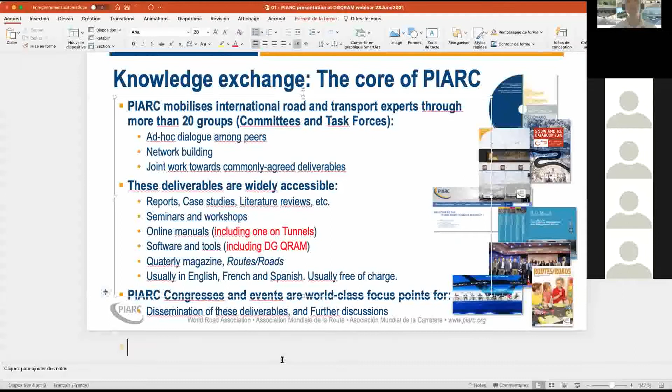In addition to seminars and congresses, we've organized numerous online events. I won't bore you with the details, but about a month ago we organized a very interesting webinar with our colleagues in India, the Indian Road Congress, on road tunnels construction and operations. And we have this webinar today. If you want to stay up to date with all these events, you can check our calendar on the website - there will be many more.

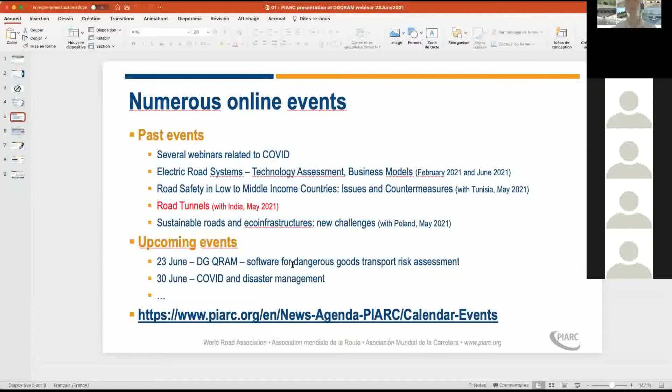The way we work is through committees - this table presents all of them. The Tunnels Committee is part of what we call the Resilient Infrastructure theme, which gives a flavor of what we're working on during this four-year cycle. Lots of topics, which will be presented more in depth, I'm sure. Let me reiterate that this is one of our most dynamic committees.

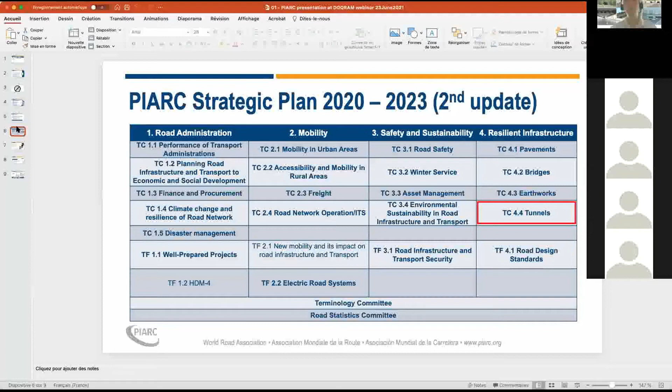Recent publications include one on tunnels called Improving Road Tunnels Resilience, published a few months ago, and others. There will be many more coming in the next months, and I invite all of you, if interested, to check them on our website and download them - they are free.

This is a very interesting webinar today - I think we haven't talked about DG-QRAM in a long time. If you want to know more about what we do and join us for future events, please note the World Winter Service and Road Resilience Congress, taking place virtually in February next year, the SURF conference in September, and in October 2022, together with our colleagues from Spain, we organize...

In October in Spain, together with our colleagues from the Ministry in Spain and all the excellent partners we have in that country and internationally, the second International Conference on Road Tunnel Operations and Safety. The first took place in Lyon, France in 2018, and the second is going to be just as great.

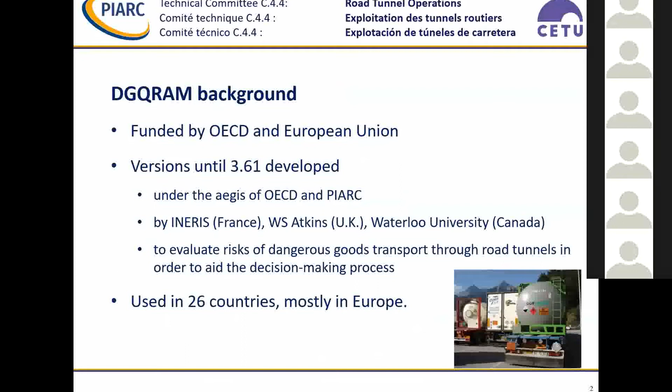Sorry for this, we have made some tests, but as always, even when there are tests, it doesn't always work. So how is it now? No. Okay, let's try again, sorry for that. It should work, I will try another thing. Okay, yeah, is it okay now? Go back to the previous one. Okay, yes, I will try. Okay, it works. So, sorry, we have made tests twice, but as always, this is always the day it doesn't work properly.

Let's go to the use of DG-QRAM. So you can use this to assess the societal risk of transporting dangerous goods through a tunnel or along a route. Then you can compare the societal risks with reference criteria or between routes. You could also assess the societal risk for each ADR category in order to determine which category minimizes the risk. But with the current version 3.61, it requires some expertise to do so. We will ease this with a new improved version, and Nikos will tell you more about this.

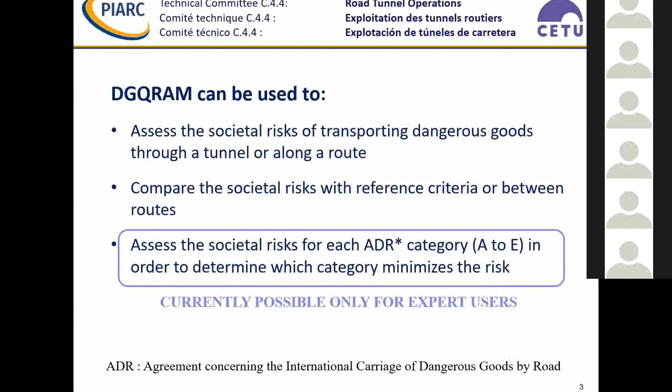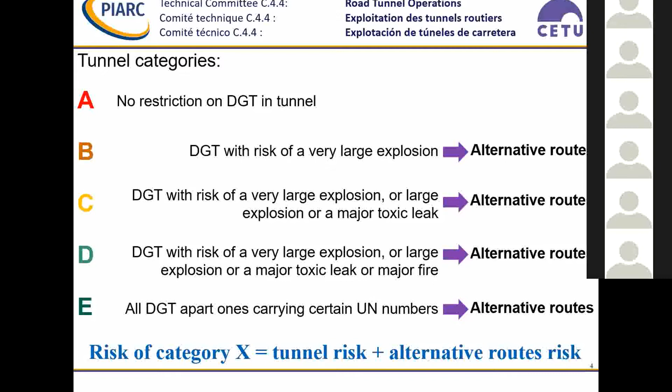So let's have some words about tunnel categories from A to E. Each category corresponds to a certain risk level acceptance in the tunnel. That means for category A, all dangerous good transports are allowed in the tunnel. With category B, dangerous goods transport with risk of a very large explosion are forbidden in the tunnel and must circulate on alternative routes. Through to category E, nearly all dangerous goods transport are forbidden in the tunnel. Therefore, the risk of a given category is the sum of the risk on the tunnel routes and of the risk of alternative routes. That means the risk of dangerous good transport allowed to travel in the tunnel, plus the alternative route risk, which is the risk of dangerous good transport forbidden in the tunnels that must circulate on these alternative routes.

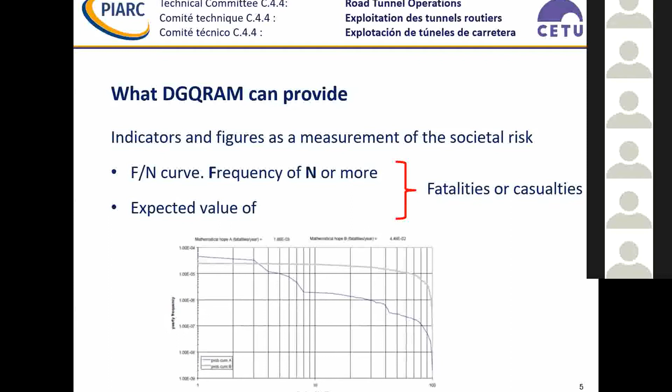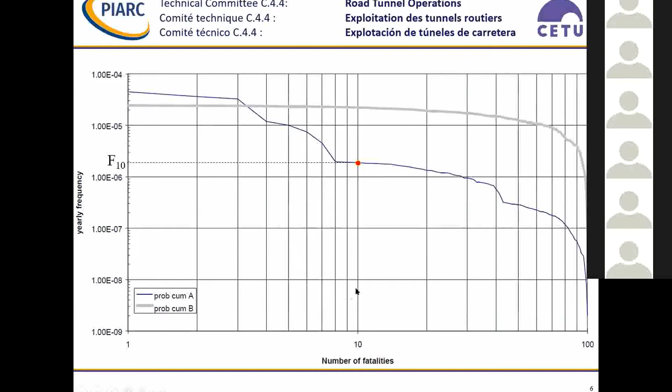DG-QRAM can provide you indicators and figures as a measurement of the societal risk, especially FN curves, in which F is the frequency to have N or more fatalities or casualties. The second result type is expected values of fatalities or casualties. If we look at a given curve, given the principle that F is the frequency of N or more, you always have downward curves, represented with an abscissa in logarithmic scale. If you look at this red point, it represents the frequency to have 10 or more fatalities. So F10 is the frequency to have 10 or more fatalities.

Then let's talk a bit about how DG-QRAM works. I won't say so much here because Raphaël will tell you more throughout an example.

Mainly the DG-QRAM tool is based on 13 scenarios. 11 of them are linked to specific dangerous good phenomena, and there are 2 fire scenarios for certain dangerous goods. Of course, these 13 scenarios are not exhaustive, but they are representative of all the dangerous goods you could have en route, and sometimes for certain of them in a conservative way.

These scenarios are modeled by the tool based on input data you feed them with, like characteristics of routes, traffic, including the time period, etc. And after some calculation, it will give you outputs: FN curves or expected value.

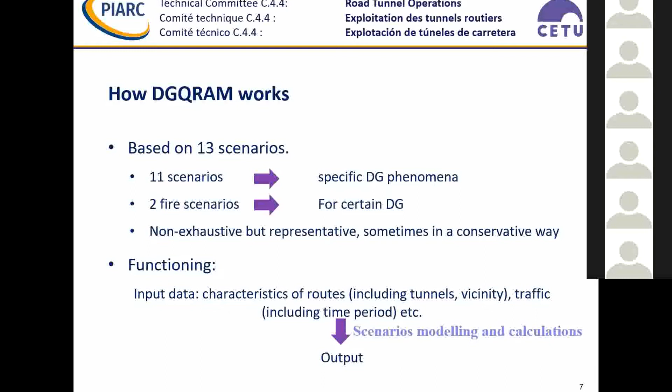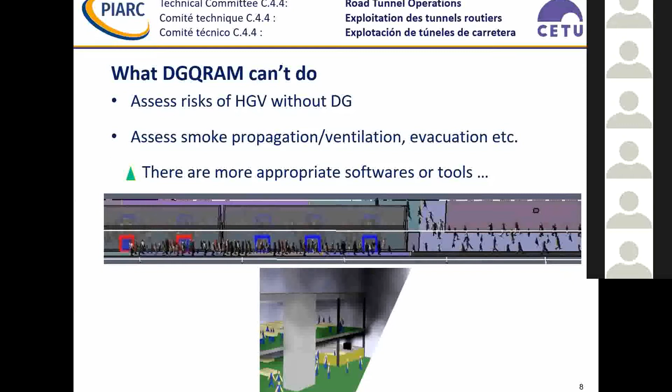DG-QRAM is not the best software or tool to do certain things, especially it's not the most appropriate software to assess risk of heavy goods vehicles without dangerous goods, or to assess smoke propagation, ventilation, evacuation, etc., because its focus is not the fire itself, but the dangerous good phenomena. So there are more appropriate softwares or tools that will give you this kind of assessment, like FDS, for example, and of course, others.

To properly use DG-QRAM and somehow enjoy it, you need some general competencies. First, in tunnel safety and equipment, for instance ventilation, but also in the field of safety and risk assessment of dangerous good transportation. And it's necessary to have a good knowledge of the DG-QRAM user's guides before trying it. It may be a bit frustrating, I know, but it's far better to first read the DG-QRAM user's guide and then afterward use the tool.

Then you should also be aware of the software limitations and understand it in order to properly interpret the results, because as all tools, it has its limitations. And at best, you need training, a specific training to use DG-QRAM.

So the next sessions are likely to be organized in 2022. I invite you to check regularly the PIARC website, and you have a link below with information to find the information regarding this training session. As I said, the next sessions are likely to be organized in 2022 after the end of the project.

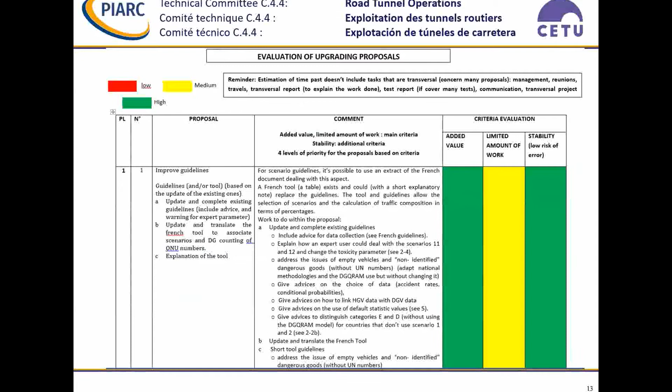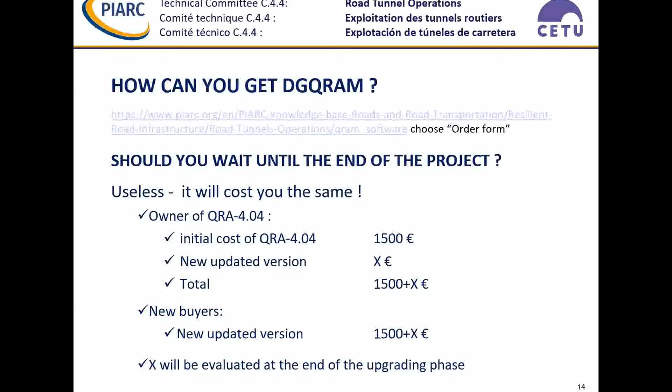So to conclude, you can get DG-QRAM again by using these links. You will have all the presentations after this webinar, and by choosing order form, you haven't to wait to buy the software. If you buy the current version 4.04, and if you update it later by paying some euros, it will cost you the same as if you buy the new updated version after the end of the project. So this is the end of my presentation.

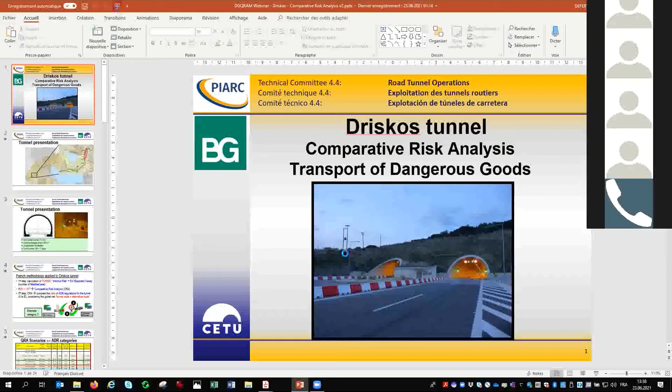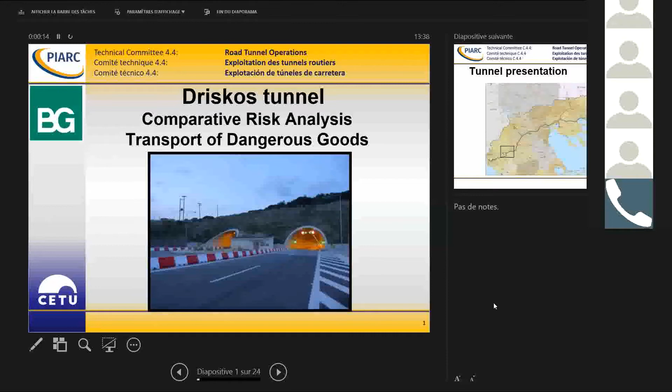Yes, perfect. Good afternoon, my name is Raphaël Defert. I am an expert in tunnel safety and industrial risk. I'm very pleased to speak about this software, which is a part of my professional life. 20 years ago, and then 10 years ago, I participated in the development of this model for PIARC, and later for the Swiss administration. Now I am the project manager for new developments of the model. I also provide training courses for new and experienced users, and from time to time I have the chance to use this software for case studies, such as the Driskos tunnel that I'm going to present to you now. For my part, Driskos tunnel is a good example of an international case study because it's a Greek tunnel, and we applied on this tunnel the French methodology for transport of dangerous goods assessment.

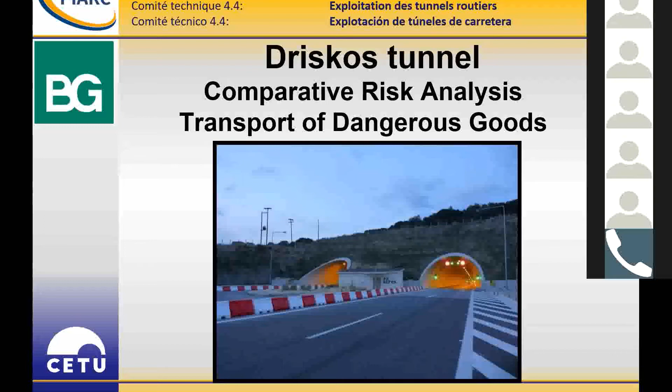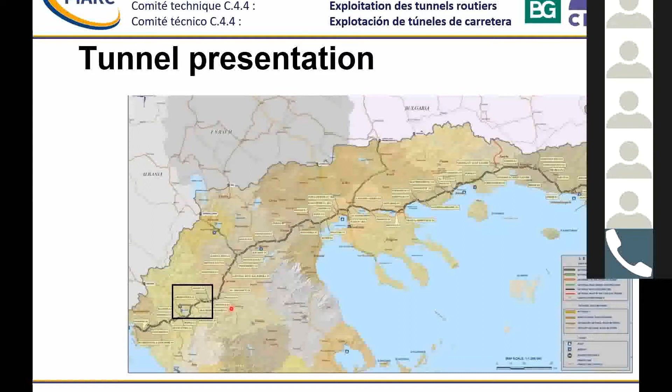A short presentation of the tunnel, if you can see my screen. We are in the north of Greece. There is a long motorway in the north of Greece operated by Egnatia Odos - I'll just show this motorway. In the west part of this motorway, there is the city and lake of Ioannina, and of course there is a tunnel in this area on the new motorway - it is the longest tunnel of the Egnatia network.

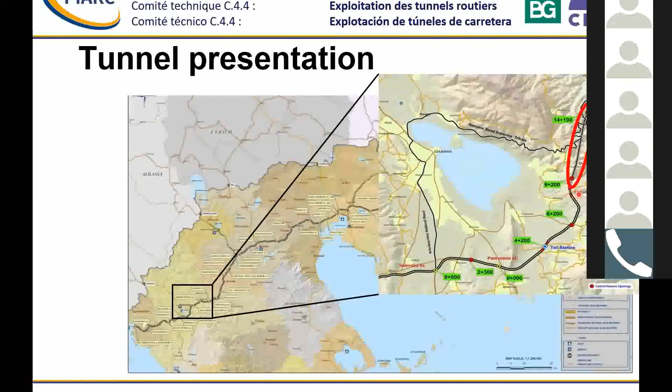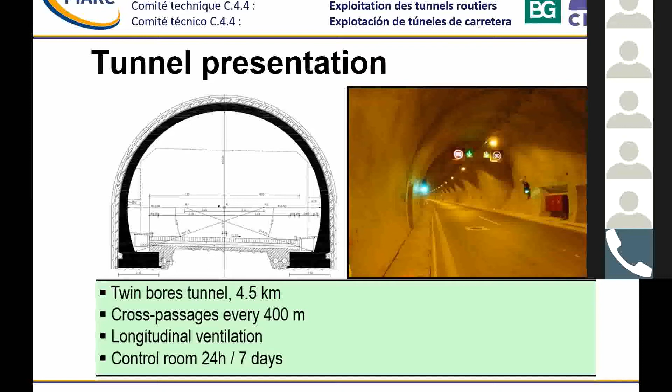The presentation of the tunnel: it is a twin bores tunnel of 4.5 kilometers with cross passages every 400 meters. There is longitudinal ventilation and also a shaft in each bore, and it is a tunnel that is monitored 24 hours a day.

Some words about the French methodology we have applied. In France, there is a first step which consists in calculating the risk of the tunnel itself, the absolute value of the risk for the tunnel. This is what we call intrinsic risk or expected value. It's not very funny, but it corresponds to the average number of fatalities per year linked with the transport of dangerous goods. If the risk is higher than the threshold, that is 10 to the minus 3, you have to carry out a comparative risk analysis. If the risk is lower than this threshold, you have the possibility to allow dangerous goods in your tunnel.

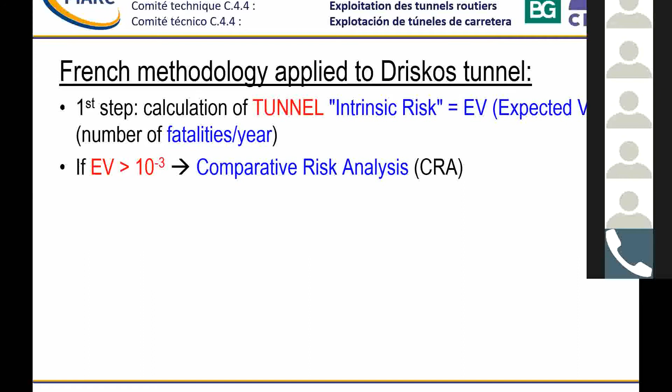Then in the second step, you have to compare the risk according to the different ADR regulations for the tunnel, A to E, and you have to consider the whole risk of the tunnel route plus alternative route. I'm going to explain with a short example, it will be easier for you to understand.

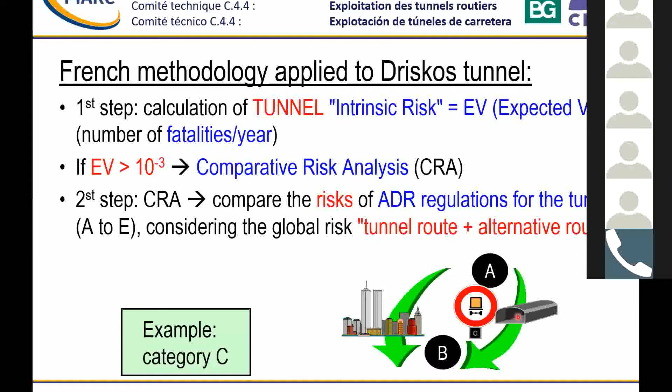Imagine you have a transit of dangerous goods between A and B, and you have a tunnel route, and you have an alternative route through a city, for example. Imagine your tunnel is in category C, for example. That means that you have to assess the risk of the dangerous goods that will pass through the tunnel, that means all the dangerous goods except LPG and toxics that are forbidden for class C. And you have also to calculate the risk for these dangerous goods on the alternative routes, because they are forbidden in the tunnel, but they are going to pass through another route.

And there are also risks outside the tunnel, in the city, for example. The purpose of a comparative risk analysis is to calculate the whole risk and to find the category that will optimize the level of risk for both routes.

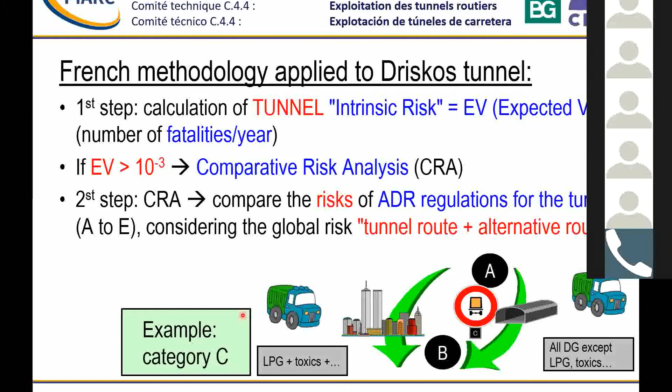Here you have the list of the scenarios in the QRA and the corresponding ADR category. The QRA was developed before the definition of the ADR category, but by chance, there is a perfect adequation between scenarios and restriction codes.

So if you have a tunnel of category A, that means that all dangerous goods are allowed, and all the scenarios you see here are possible in your tunnel. If you are in category B, for example, you see here restriction code B for these 3 scenarios corresponding to LPG - 3 phenomena linked with LPG. That means that if you have a category B, you could have all the scenarios except these 3 ones that are linked with LPG, which is forbidden in a tunnel of category B.

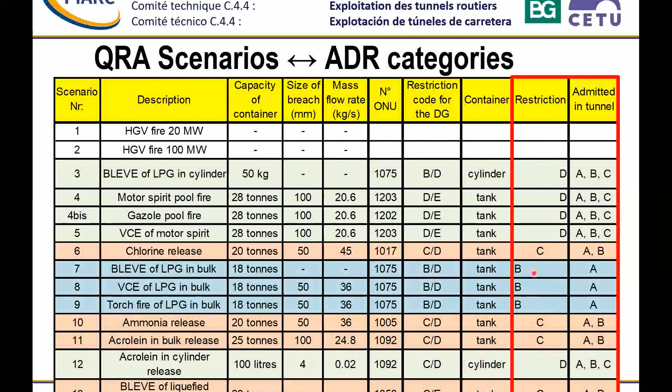Then for Driskos tunnel, as I said, we have carried out the first step for the tunnel - that means calculate the risk only for the Driskos tunnel. You have an overview of the input data that are required for that. First of all, the traffic data that were given by the operator, Egnatia Odos, in 2008, and these data were extrapolated to 2020.

Same thing for DG traffic - we have made some countings that we have extrapolated to 2020 also. For the tunnel itself and its operation, we have considered the current situation when we have done the study. For ventilation, we have made some calculations in order to know what will be the air velocity in the tunnel in case of a DG event, taking into account the capacity of the mechanical ventilation in this tunnel. And for accident rates, as it was a new motorway, of course, we hadn't some statistics about this road. Then we have taken into account some default values, and we have made some sensitivity analysis on these default values.

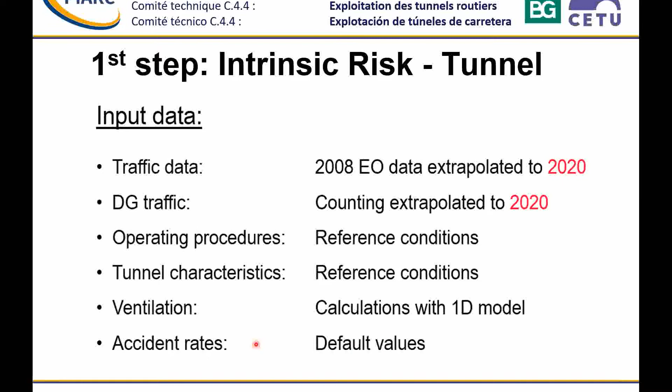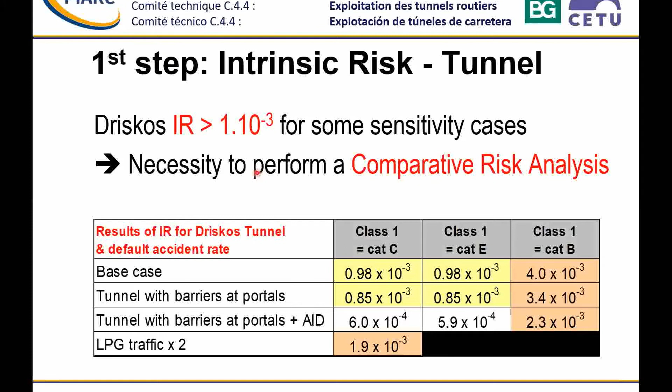The calculations - we have the results were around the threshold of 10 to the minus 3, but we have seen that for some sensitivity cases, the value of the risk was higher than this value. That's the reason why we have performed a complete comparative risk analysis. This is the second step.

For us, there is no use to take into account this truck - we only consider the transit between A and B.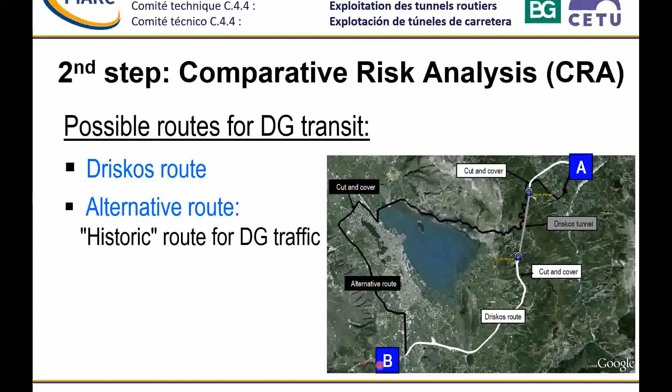The first step when you perform a comparative risk analysis is to split your routes into homogeneous segments. We speak about homogeneous when we have the same infrastructures, for example tunnel or open road, the same number of lanes, the same speed limit, the same traffic, and so on, because the QRA model calculates risk when these parameters are fixed.

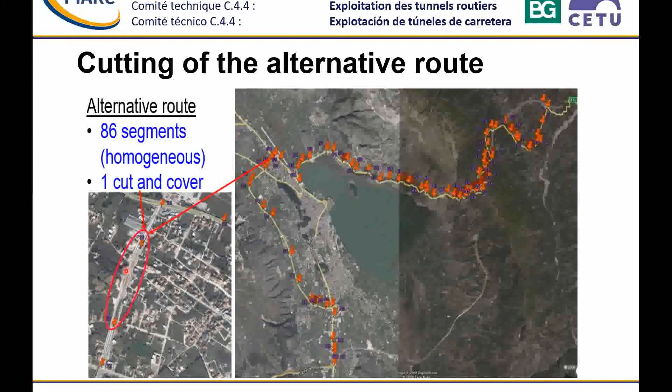On the alternative routes, we had 86 homogeneous segments. As you can see, there were specific segments which were cut and cover on the alternative routes near the airport of Ioannina. On the motorway, there were only 27 segments with 3 specific segments: one for the tunnel, Driskos tunnel, and 2 cut and covers in the north and south of the tunnel.

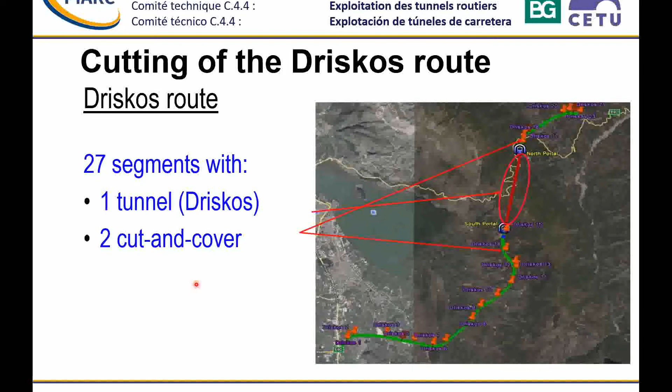An important point concerning the entrance data for the model is traffic data. Why? Because if you have an accident, a DG accident, a DG event, the first population that will be possibly impacted by an event will be the people, the road users on the infrastructures. So it's very important to know the level of traffic during different periods of time.

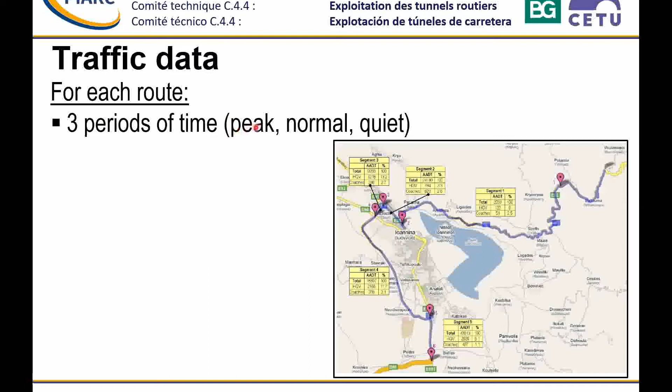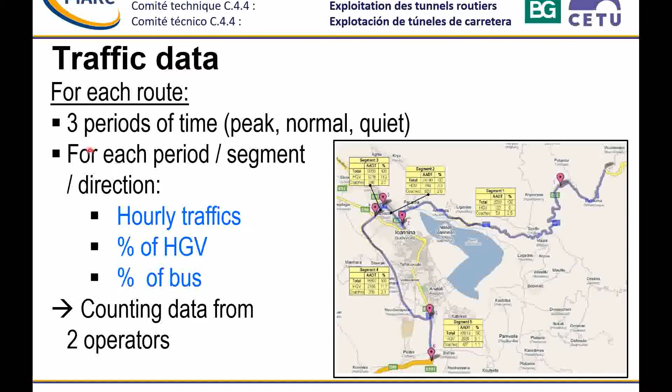We have to define a maximum of 3 periods of time. Generally we have a peak period during the day, in the morning and end of afternoon. We have a normal period during the day, excluding the peak period, and a quiet period during the night. For each period, each segment, and each direction, if the traffic is not symmetric, you have to know the hourly traffic, the percentage of HGV, and the percentage of bus. For that, we have organized some countings with the 2 operators, so for each route we have this information for each segment of the route.

Same thing for DG traffic data, of course, which is very important data we need when you perform a comparative risk analysis. As I said before, we have to know the transit between A and B. Then for each period of time and each direction, we need the hourly traffic, but also the composition of the traffic, that means the percentage of each DG class.

Because according to the nature of the DG, the effects and consequences on local population and road users won't be the same at all - flammable liquid or gas, toxic gas or flammable gas, the distances of effect are not at all the same. So the composition is also very important, and the volume of dangerous goods also. For that, we have also organized some specific countings during 2 weeks to count all the dangerous goods traffic on the historic road.

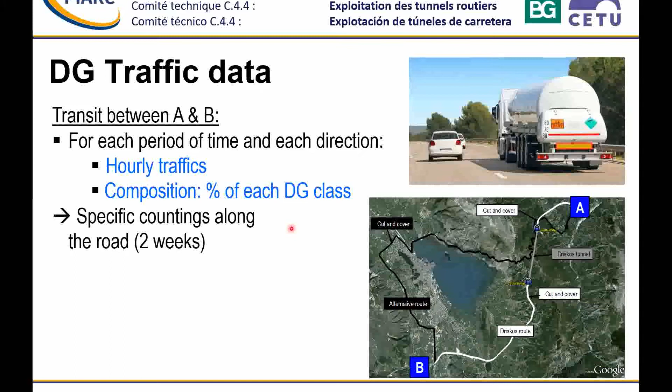Just an overview of the results of the countings. The first 2 bullet points concern danger code 30 and 33. As you can see, it is something like 70% of the traffic. It is linked with flammable liquids, and most of the time this category is the highest part of the traffic.

A very specific point concerning the counting for Driskos is the importance of class 1 explosives. Generally this class is lower than 1% of the traffic - very few dangerous goods like that. But in this case there were 10% of the traffic for class 1. This is normally linked with the fact that the motorway was under construction, and the works required the transport of class 1 for these works.

In this case, the best way is to associate these dangerous goods to scenarios 7, 8, and 9, which correspond to LPG. There were also a small proportion of other flammables that we associated with pool fire, some infectious matters that were not affected to scenarios of the QRA, and class 23 corresponds to flammable gas, which was LPG, associated to these scenarios 7, 8, and 9. There were other dangerous goods but they were not associated to QRA scenarios.

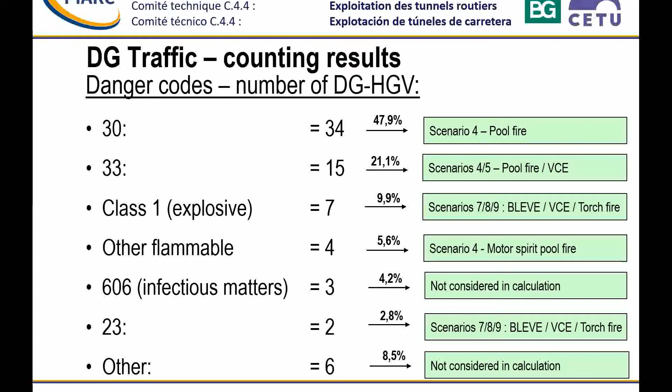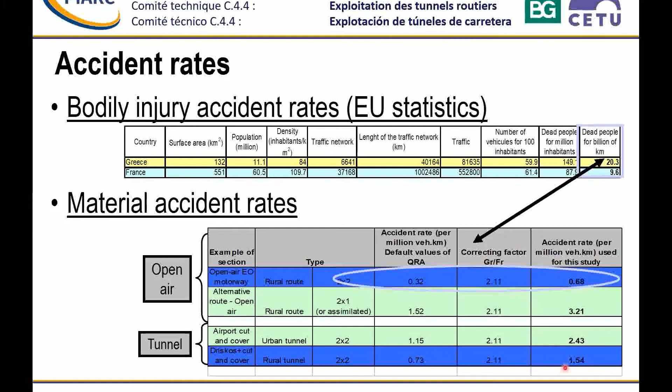Concerning accident rates, unfortunately we hadn't some data about accidents on the roads at this time. What we have done is use some accident rates for France according to the fact that we are in open air or in tunnel, 2 lanes or 1 lane, a rural route or urban route - so we have a lot of accident rates. We have considered these accident rates and corrected them by a correcting factor between Greece and France according to EU statistics. This gives us the accident rates for every segment in Greece. Of course, we have made some sensitivity analysis around these values to be sure of the results.

Another point, I spoke about the traffic, but also the population is very important because in case of event, the population could be impacted also. So the first point is to define a grid around the itineraries to be sure that in case of event, all the effects will be inside this grid. Don't be afraid, in the user guide there are a lot of tricks to explain how to fix, how to define your grid around your itineraries. The first step was very simple, just to locate, to spot the populated area inside this grid of population.

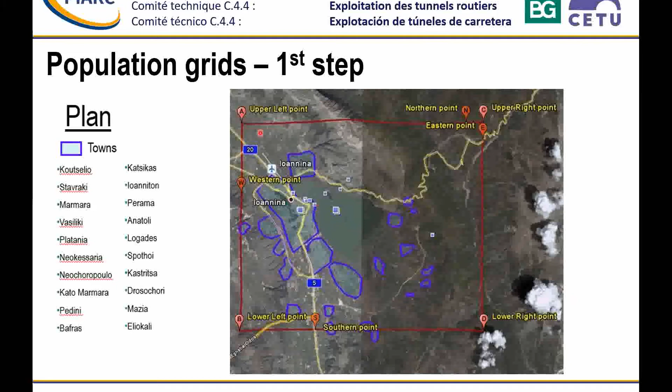After that, it is the most important work, even of the QRAM model. You have to define some squares of population, something like 200 meters by 200 meters. And in each of these squares, you have to calculate for each period of time, for night, for day, the number of people according to housings, offices, schools, hospitals, stores, and so on. Of course, it's a huge job, but it is a very important job.

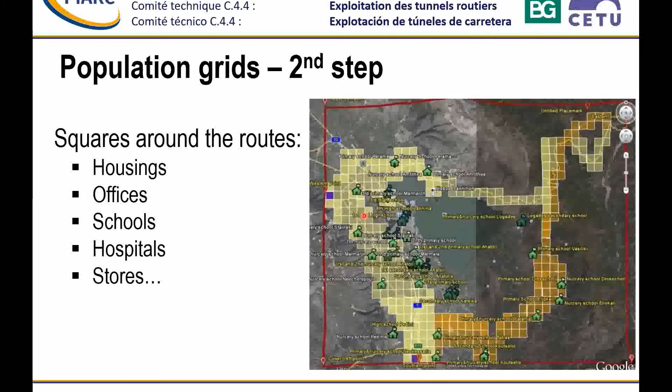And now perhaps we have some new tools. If you use GIS, for example, you have a lot of information about population that you can use and calculate the number of people in each square. So at the end of the procedure, the holy grail of the QRAM model is a grid like that. Each case corresponds to a cell, a square we have seen just before. And for each period, you have to fill the number of people, which is the sum of all the contributions we have seen: housings, offices, and so on.

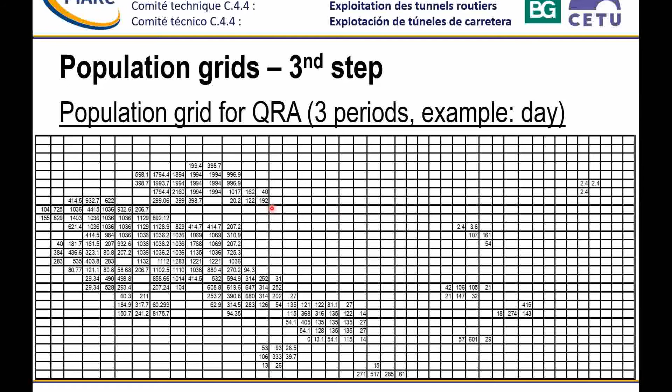Another point, it is meteorological data because we have some scenarios in the QRAM model that are influenced by meteorological data. That means the direction of the wind and also the speed of the wind. The direction is very simple. If the direction of the wind is in one direction or in another, there won't be the same populated area in the direction of the wind. So it is necessary to know the wind rose. And for Driskos, we have the chance to have 2 years of data that made it possible to create this wind rose, which is an entrance parameter for the model.

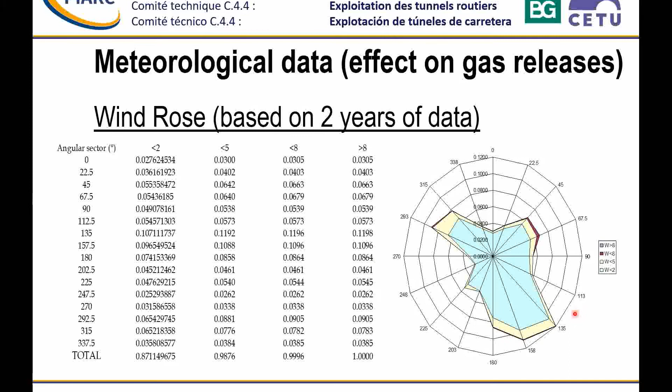And last point concerning entrance data, of course, the tunnels, because tunnels are very specific segments for which we need some specific data also. There is data about the geometric characteristics of your tunnel. There are also characteristics about the drainage system, because it has a role in the way the flammable liquids released will be absorbed by the drainage system. Of course, the interdistance between emergency exits, ventilation, and so on. So you have to get all this information before you calculate risk.

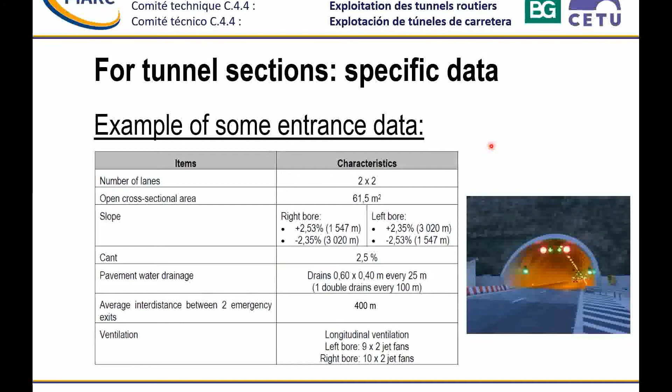So I'm sure that now you have just an idea in mind, to know the results once we have filled all this data - just the information to fill and to get and to work on all this data takes something like 1 or 2 months of work.

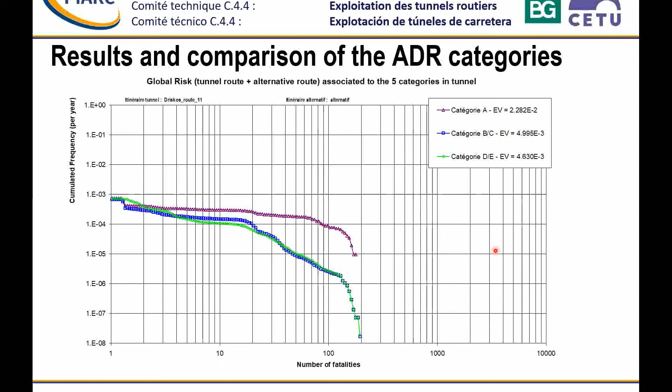So we have seen before the way the model builds some FN curves. If you see here, the curve is corresponding to category A. That means that all dangerous goods are authorized in the Driskos tunnel. And this is the risk of category A. And if you pass from A to B, you are going to forbid LPG in the Driskos tunnel. And you see the influence on the risk level. If you forbid LPG in this tunnel, the curve will be like that.

It is a blue line, and of course the risk is lower. Why is it lower? Because if you take into consideration, for example, 100 fatalities, it means that if you are in category A, the frequency of occurrence here will be much higher than the frequency of occurrence if you are in category B. That means that the risk is higher for category A than for category B. And here you have the value of the expected value, that means the number of fatalities per year on average. And you can see that between A and B, there is a ratio of 5.

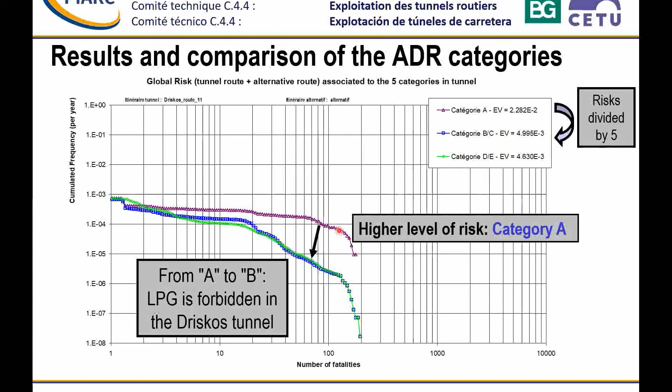So of course, the higher risk is for category A in this case. I have to specify that, of course, it is not a generic conclusion about this kind of study. It depends completely on the data you are going to fill in the model. So don't take into consideration that the route with the tunnel is always representing the higher risk. It is not at all the case for all the cases.

That means in France we have to consider other criteria to decide the best solution for the tunnel. For example, there is what we call risk aversion. It means that if you have events with a very low frequency but very important consequences, it is a very specific event because the mediatical, societal, or political impact will be very specific.

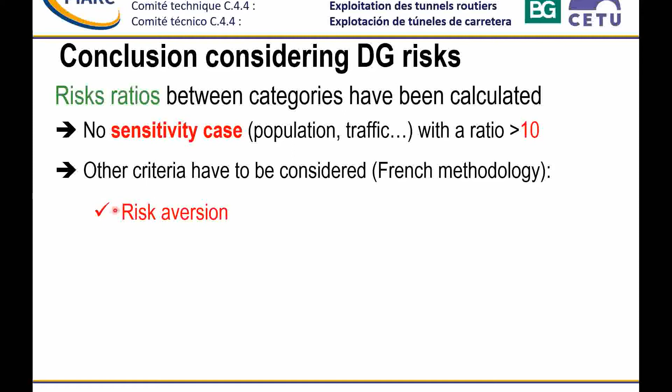Also, in the model we calculate the risk linked with dangerous goods, but DG HGVs are also simple HGVs, and these HGVs could result in road accidents and fatalities just because of the accidents. This criteria allows us to take into consideration these specific fatalities.

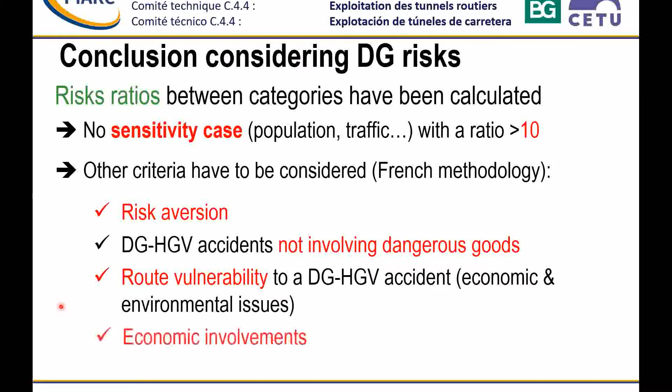Also a criteria about route vulnerability in case of dangerous goods accidents, from an economic or environmental point of view for example, and also the economic implications of the decision we have to take.

This is my last slide. We have seen that for DG risk, the risk of category A was higher than the risk for the other categories, but the ratio of risk was between 3 and 10. In France we consider that the difference between these risks is not sufficiently significant.

Why? Just because you have uncertainties. You have uncertainties in the model itself. You have uncertainties in the data you use. And of course there are uncertainties with the user of the model.

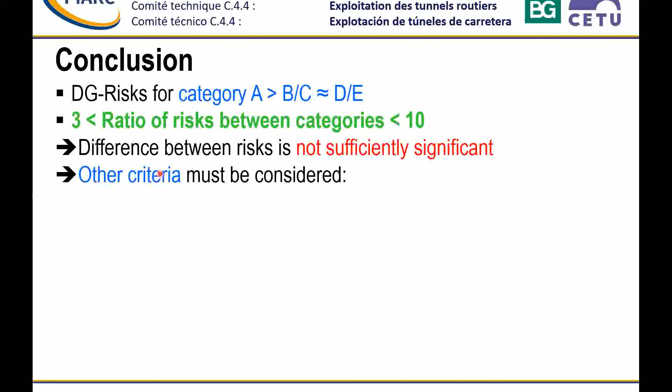Then we have to consider other criteria, as we have seen. I haven't got the time to present you in detail the analysis we have done for other criteria, but the result was that category A, B, or C were the most appropriate restriction regimes according to the other criteria.

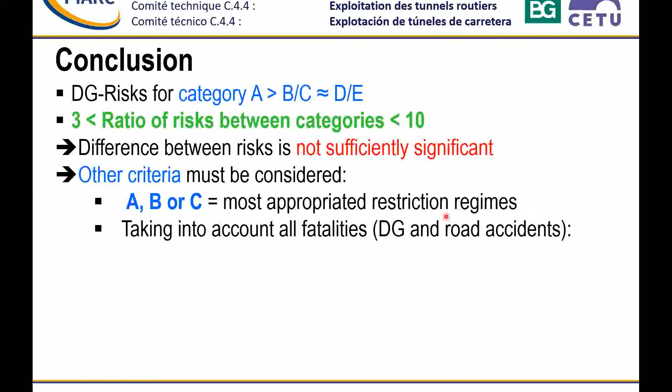At the end, if we take into account all fatalities - that means DG fatalities calculated by the model, and also fatalities linked with road accidents as I mentioned before - category B would minimize the global level of risk. In this sense, our advice was to allow all dangerous goods in the tunnel, except those that may lead to a very large explosion, which is the definition of category B.

And that means you have to forbid LPG. What is interesting also is that we saw LPG was a very small proportion of the traffic. That means, in terms of constraints on the traffic, it was very few trucks that had to pass through Ioannina instead of the motorway.

So from an economic point of view, and for the transporters, it was not so much a problem to forbid LPG in the tunnel.

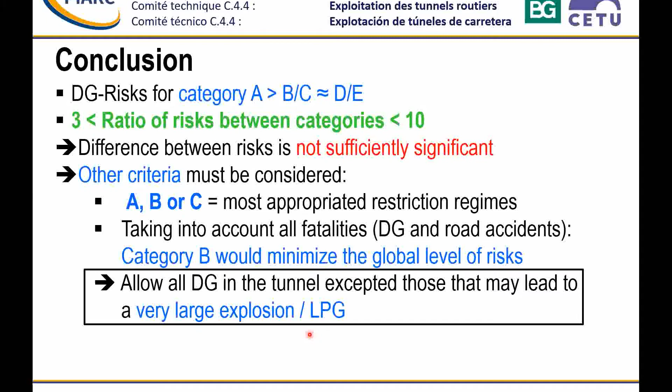I have finished my presentation, and now if you have some questions, I'm going to try to answer you.

During PIARC's last cycle, the expert group of the Technical Committee for Road Tunnel Operations identified, evaluated, and prioritized a number of proposals for the upgrade of DG-QRAM. A communication process was established where CETU, and specifically Christophe, was appointed as the project leader, while after the necessary tendering procedures, Enalos was appointed as the technical consultant, and BG, my friend Raphaël, with the support of ILF, were appointed as the development contractor.

In total, 21 proposals were identified by the expert group and evaluated against 3 criteria: added value for the users, amount of work required, and stability of the final software. This criteria has also been presented before by Christophe in one of his slides. The evaluation concluded in 4 priority levels. Finally, 14 proposals out of the total of, how many are they, I don't remember, 25, were selected in order to be included in the upgrade project of DG-QRAM.

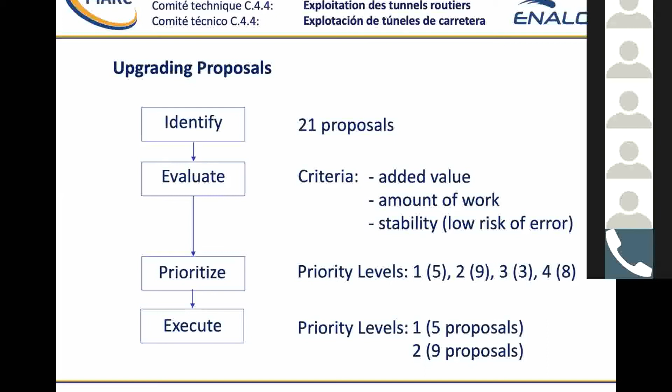The first proposal for improvement of priority level 1 is to get results for each ADR category. In the current version of the software, the user can get results for each ADR category by manually selecting the relevant group of scenarios that corresponds to the specific ADR category. With the proposed improvement, which has already been completed, this is done automatically, not only for the tunnel itself, but also cumulated for both routes if there has been a route comparison in the calculations.

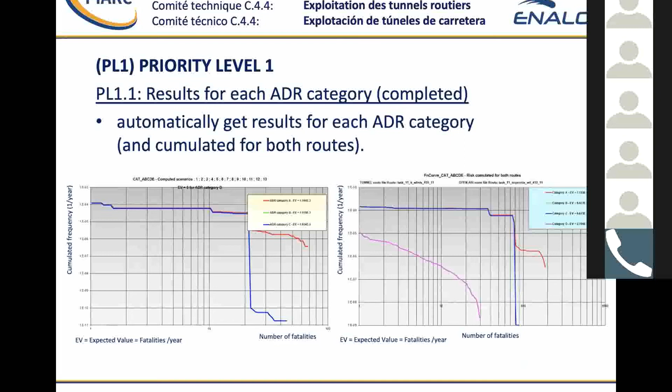The second proposal involves the improvement of guidelines and includes advice for data collection and changing toxicity parameters for scenarios 11 and 12. I remind you that 11 corresponds to acrolein bulk release and 12 to acrolein cylinder release.

Addressing the issue of empty and non-identified dangerous good vehicles during countings, appropriate choice of data, mainly accident rates and conditional probabilities, how to link data between heavy good vehicles and dangerous good vehicles, and very careful use of default statistics. We need to distinguish categories between D and E according to ADR, linking all dangerous good codes to different scenarios, and finally how to consider the rest of the ADR classes not directly related to the scenarios, including class 1 explosives, class 4 flammable solids, class 5.1 and 5.2 oxidizing substances and organic peroxides, class 8 corrosive substances, and class 9 miscellaneous substances.

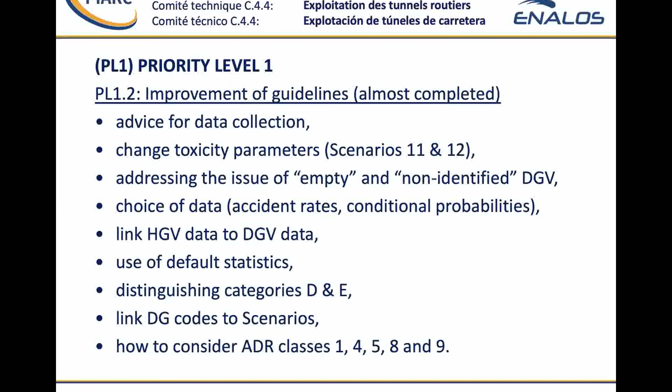The next proposal is the elimination of scenario 1 and 2, but only for non-dangerous good vehicles. We keep scenarios 1 and 2 - 20 and 100 megawatt fires - for fires coming only from dangerous good vehicles. In the current software, the user can calculate the expected value from heavy good vehicles not carrying dangerous goods, but since the DG-QRAM software concerns only dangerous goods, it has been decided to eliminate this option.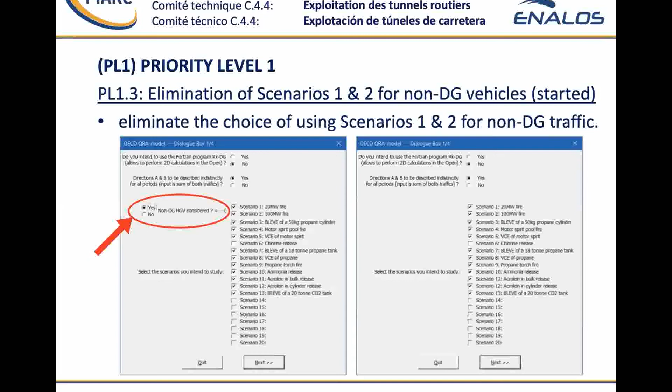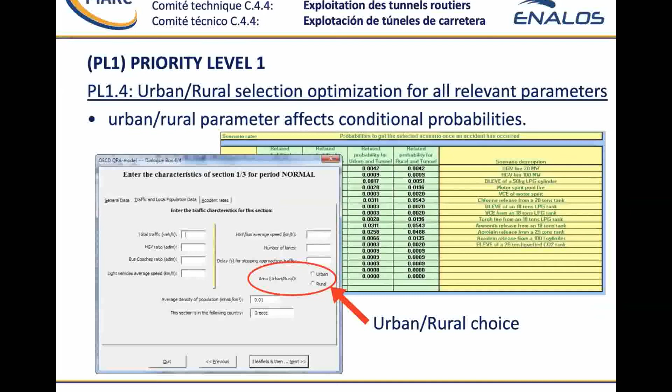Another proposal for improvement is to replace the urban-rural selection with another more relevant parameter. The urban-rural parameter affects the conditional probability to get a final scenario once an accident has occurred. This mainly depends on the speed limit enforced for the route under examination. By implying that we have a high speed limit in rural areas and a low speed limit in urban areas at all times, we may not conclude the correct results. For example, we may have a high speed limit route with tunnels, like a ring road inside urban areas.

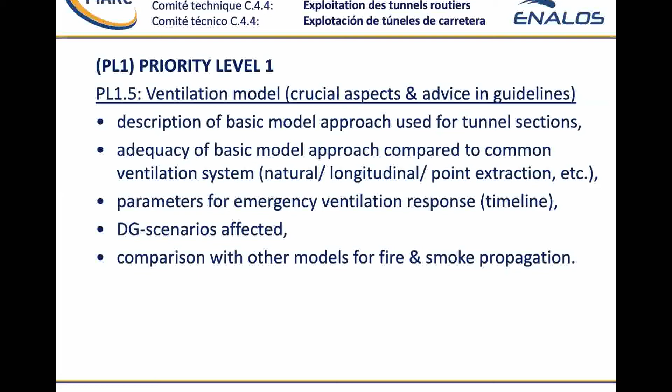The next improvement deals with the ventilation model of the software, involving mainly advice in the guideline without any software modification of DG-QRAM. The advice includes a description of a basic model approach used for tunnel sections, adequacy of this basic approach compared to common ventilation systems such as natural ventilation, longitudinal ventilation, point extraction, and other systems, parameters for emergency ventilation response, dangerous goods scenarios that are affected, and a comparison with other models for fire and smoke propagation.

That was the first five improvements for priority level 1, and the next priority level, number 2, involves nine improvements.

The first one has to do with the data input interface, including improvements for unchanged data for different periods, and sections to be inserted only once, simplifying definition of tunnel sections, and ensuring completeness and consistency of data input.

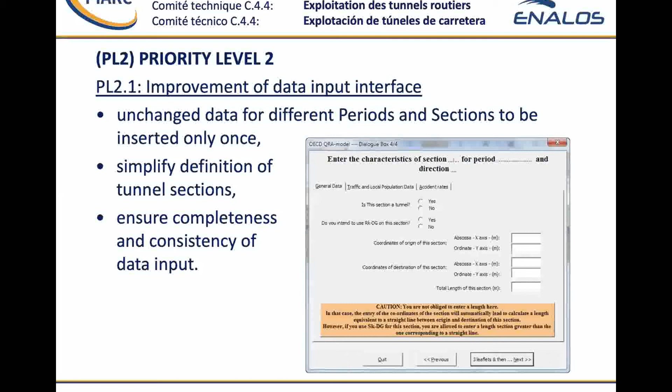The next improvement has to do with scenario 2, which in the upgraded version is only applicable to dangerous goods vehicles. The specific dangerous goods to be represented by scenario 2 will be defined, along with the conditional probabilities necessary for the calculations regarding scenario 2.

The third improvement of priority level 2 deals with enhancement of the evacuation model, mainly based on the Swiss model. It includes modification of key parameters of the evacuation model, which can only be applied through the expert user interface, and the choice of evacuation model to be used - so the expert user can choose between the current evacuation model of version 4.04 or the new Swiss model evacuation approach. All this will be updated in the guidelines with detailed descriptions.

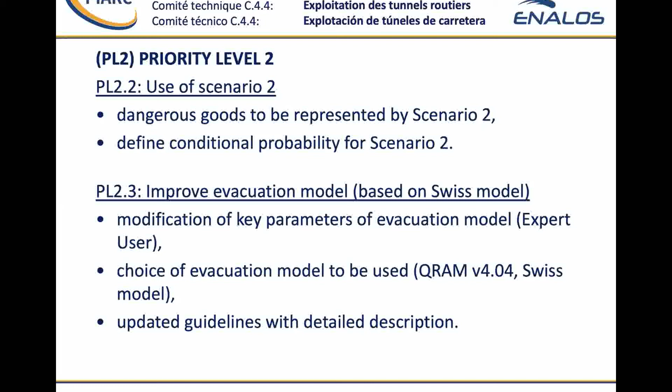The next improvement has to do with the use of scenario 2 in order to distinguish ADR categories D and E, which is not possible with the current version of the software.

Another issue dealt with during upgrading is traffic jams in unidirectional traffic and how it is taken into account by proper use of the current version of DG-QRAM. This is done by applying very low vehicle speed in one of the three available time periods. A technical note will be included in the guidelines describing how to do it.

The next improvement includes the possibility of applying different times to different sets of scenarios for time inputs, such as tunnel closure time, evacuation starting time, and ventilation activation time. This is an important feature because different times may be applied for toxic releases compared to fire incidents regarding, for example, ventilation activation.

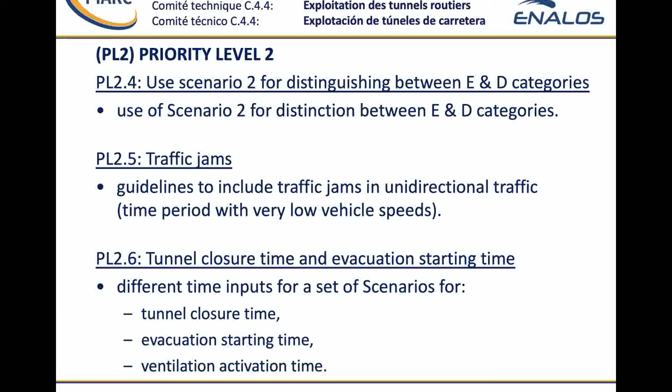One of the most important improvements is the assessment of tunnel mitigating measures. Mitigating measures are divided into native, which are included in the software, such as drainage systems, and non-native, which can only indirectly be assessed, such as barriers every 1,000 meters, hydrants and extinguisher intervals, and other measures like the fixed firefighting system that has been discussed in the previous presentation.

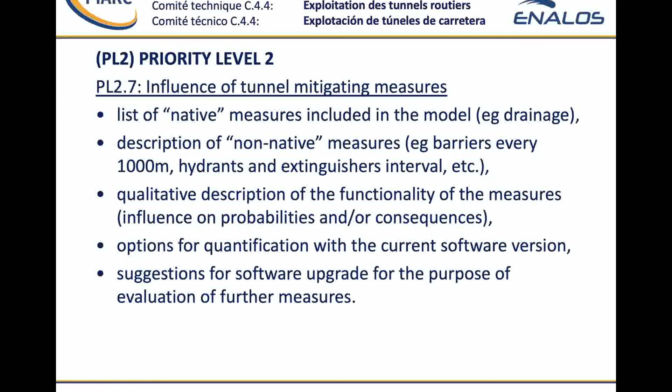A qualitative description of the functionality of various measures, including their influence on probabilities and/or consequences, will be included in a special technical note in the DG-QRAM guidelines. Also, available options for quantification of specific mitigating measures with the current software version will be described in the guidelines. Finally, possible suggestions for software upgrades for the purpose of evaluation of further measures will be recorded as well.

The next improvement includes the assessment of scenario representativeness of the existing DG-QRAM scenarios in terms of quantities in bulk and in cylinder compared to market conditions. The influence of typical variation in quantities of dangerous goods per vehicle in the existing software will be analyzed and presented in a technical note.

Last but not least, one of the most important improvements, which directly reflects the outcome of the calculation of expected value, is the review of statistics, mainly the accident rates. Various national incident data will be collected, where available, in order to update the current default values. Also, a description of the nature of statistical input data, for example collision rates of trucks, and proper use of them in the model will be included in the guidelines, along with a description of a data collection approach for adequate model application.

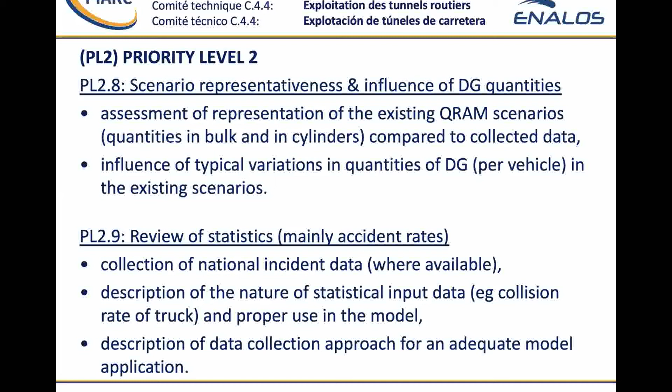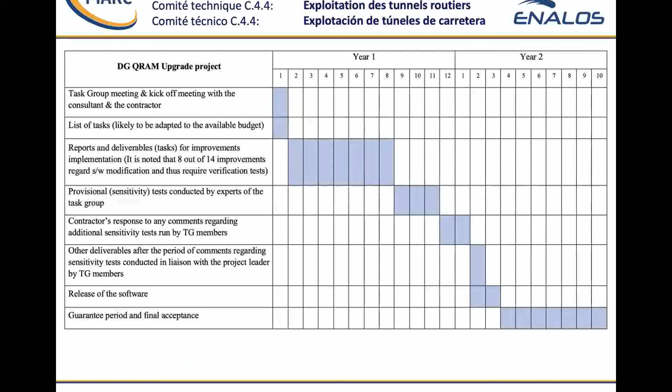In this Gantt diagram, we can see that the DG-QRAM upgrading project is scheduled to last almost 2 years, 22 months to be exact, including the guarantee period, while we are expecting to release the new upgraded version of the software in the first quarter of 2022, as Christophe has also mentioned in his presentation. I would like to thank you for your attention, and we are open for questions.

Thank you very much, Nikos. Thank you for this very stimulating presentation. We don't have questions for you right now. I suppose they will come.

Maybe, Robin, as we are a bit ahead of schedule, as you perfectly said, and we have no question for the moment, I would just like to clarify that we have already achieved the first improvements, which was to present results for each category. We are almost finished updating the user guides, and we have started working on deleting scenarios 1 and 2 for heavy good transport without dangerous goods. Our current budget has not allowed us to do more. We have remaining budget for maybe one additional improvement task. The presentation from Nikos has shown you that there is a lot remaining to do if we get additional budget.

Thank you. I don't see questions coming.

Okay, Nikos, is there a point you want specifically to point out in your presentation? No, I just want to support what Christophe has just mentioned, that we have identified 21 proposals, and we are dealing now with the current budget only with 14 of them. That's why I'm sharing this slide.

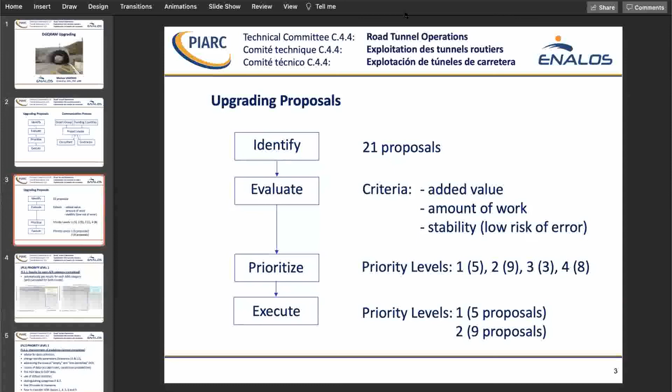It's an opportunity for me to point out that, of course, if QRAM users, especially those already experienced in using the system, have ideas, we are not committed to meet all their wishes, but any good proposal will certainly be considered by the small group working with the technical committee on tunnels on this question, and we will examine the possibility of developing new features if they seem sound.

There is a question from Nigel, which has just appeared in the chat. So maybe Nikos, if you can have a look at it and answer it, and I hope it will be inspiring for further questions. Excuse me, Robin, could you please?

I can read the question. Can you describe further the mechanisms, tools, and procedures that are used to capture incident data, and whether there is best practice in terms of collection of dangerous goods incident data, and which reduction applies as best practice?

If Mr. Stylianis can switch off the mic. Yes, Robin, I saw this question. Thank you, I thought it was for Raphaël because it was just below. Okay, no problem. So, yes. No, if you want, Nikos, you can answer.